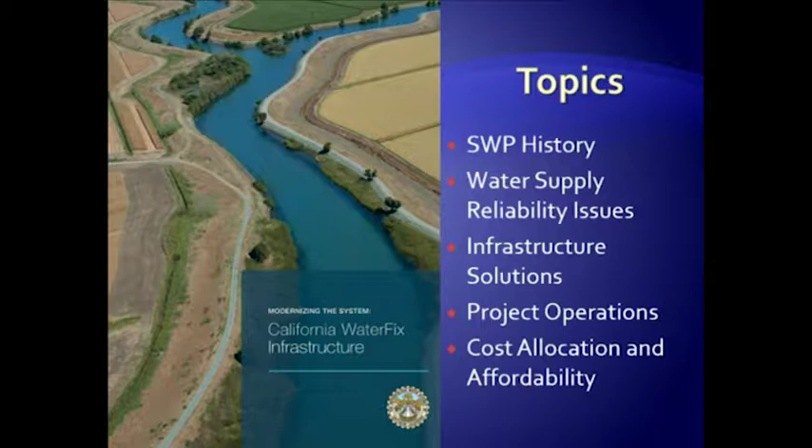I have 5 basic topics for today: a little history on the State Water Project, the water supply reliability issues we're trying to solve, the infrastructure solutions called California WaterFix, how that infrastructure will operate, and perhaps most importantly, how we'll allocate and afford the costs associated with those facilities.

The California WaterFix has a lengthy list of obligations. Number one, provide water supply reliability that has been lost. Number two, based on Governor Schwarzenegger's Blue Ribbon Panel formed 10 years ago, which came up with a Delta plan establishing co-equal goals in the Delta—increasing water supply reliability while also taking care of the ecosystem, which this project does, through flexible operations in a dynamic fishery environment.

Hopefully by the end of my talk you'll understand what I mean by that. At the same time, the project improves water quality in some instances significantly, especially for those in our service area that run surface water treatment plants on State Water Project water. We significantly reduce impacts associated with seismic events in and around the Delta, and also risks associated with sea level rise.

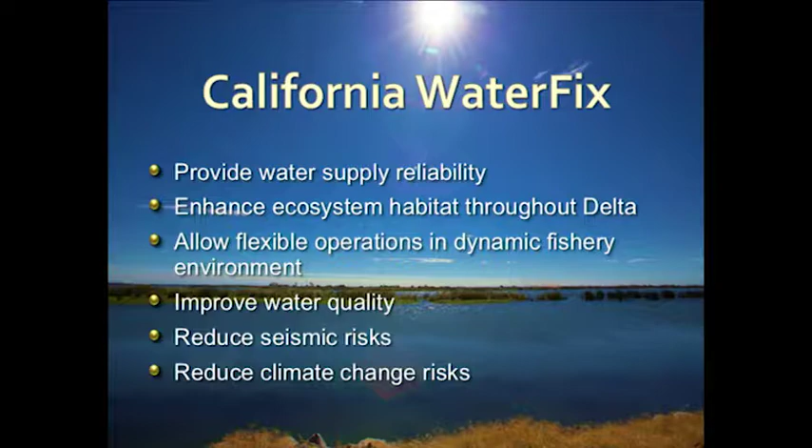This is a very brief history of the project. The first version of the California State Water Plan was in 1931. That resulted in the Central Valley Project Act, approved by the state legislature in 1933, which was the genesis of the State Water Project. It took about 38 years to make the first delivery in the State Water Project—that's the year we took delivery of our first acre-foot.

Although when the project was first built and started delivering, they recognized there was a piece missing—the piece California WaterFix is trying to fix. At the time, it was called the Peripheral Canal. I'm sure most of you who were here in 1982 remember that name. It was a hotly contested statewide proposition that failed.

There have been multiple efforts since 1982, including the Bay Delta Accord process in 1994, and then the joint federal-state project called CalFed in the year 2000. Here we are in 2017, finally with a project in front of us that can actually solve the problems created back when the State Water Project was first built.

The State Water Project is a 600-mile long system that starts on the Feather River just outside Oroville, flows down the Feather River, is captured behind that dam, joins the Sacramento River just north of the city of Sacramento, and is delivered through the Delta into the California Aqueduct. Our piece is about as far away from the origin of this water as you can get—we're that small purple bar in the middle of the bottom of the state. The system includes 19 dams and reservoirs, 20 pumping plants, 10 power plants—we're the fifth largest producer of power in the state of California—and 662 miles of aqueduct.

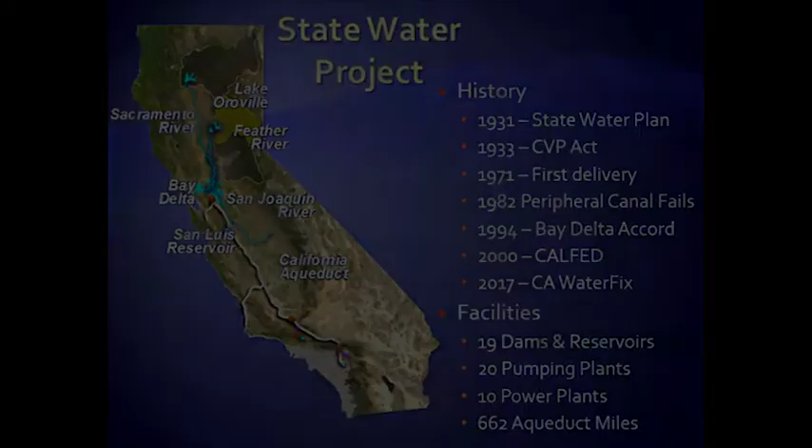California WaterFix is designed to solve four different risks, primarily in and around the Sacramento-San Joaquin Delta area: subsidence, fishery declines, seismic, and sea level rise. I'm going to go through each one of those.

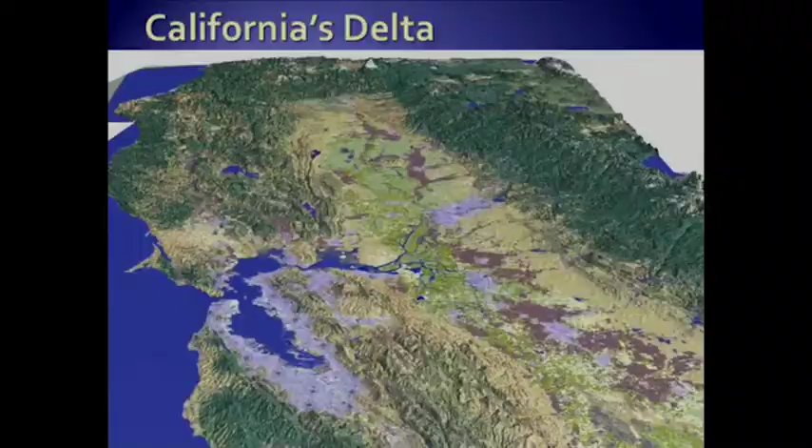First, we're going to zoom in on the environment we're dealing with. Off to the left is San Francisco Bay and the Pacific Ocean. To the north is the city of Sacramento. To the east is the city of Stockton.

How water gets into the Delta is a very interesting area. 80% of the flow that enters the Delta comes from the Sacramento River. This is really good quality — essentially snowmelt from the northern Sierras.

We also get 15% of the flow into the Delta from the south. The San Joaquin River flows north and the Sacramento River flows south, and they join in the Delta. That provides about 15% of the flow, and it's very poor quality because it's primarily agricultural runoff.

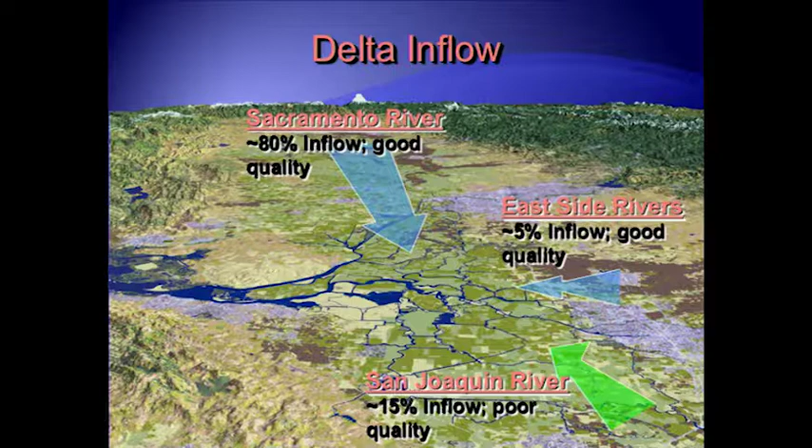There's another 5% of inflow that comes from the east side rivers, which again is captured in dams primarily and delivered to customers and/or to the Delta, and it's primarily snowmelt, so it's very good quality. The important thing to remember is this is a saltwater or tidal influenced Delta.

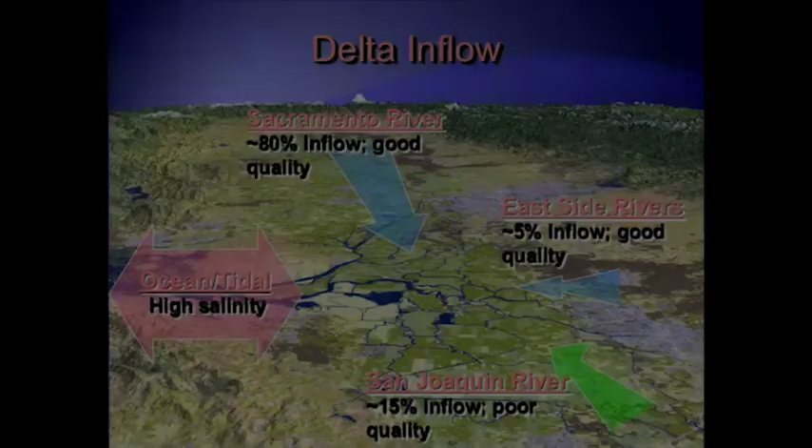So how is water used in the Delta? 76% of the water flowing on the surface that comes into the Delta flows out to the Pacific Ocean. 6% of the water is used by agricultural interests in the Delta, and 18% is delivered to the Bay Area and to Central and Southern California.

Now, if you were to listen to our detractors, they would have you believe that we are diverting 76%, but it's actually 18%.

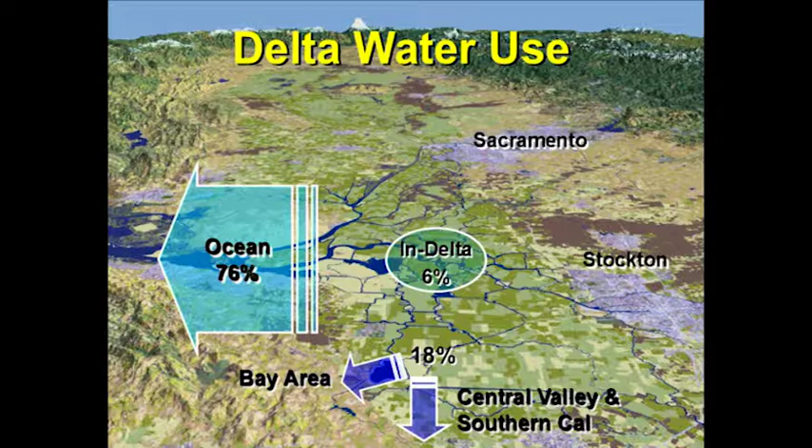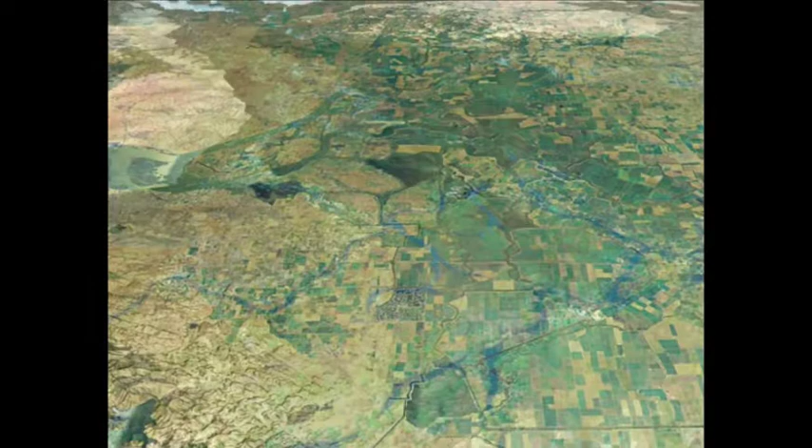This is a picture, a view of what the Delta looks like today. It's essentially agriculture, but we're going to step back in time roughly 170 years, and this is what it looked like before we decided to turn it into an agricultural preserve.

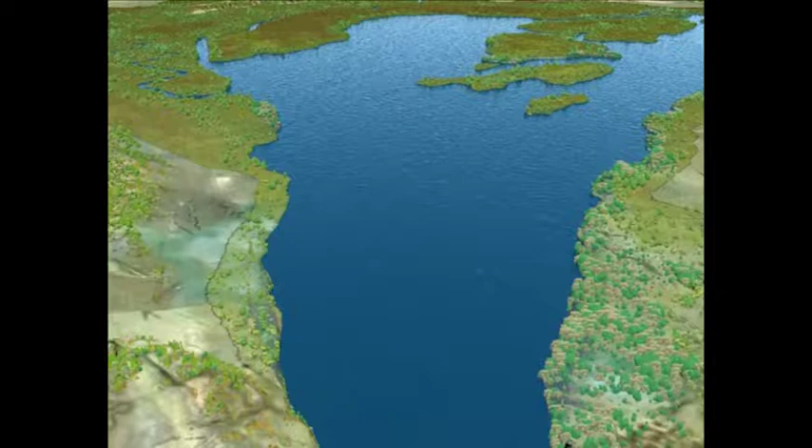This would have been a tidal influenced estuary, where during the spring and winter, fresh water would rush out of the rivers and the Sierras, pushing the salt water out into San Francisco Bay. In the summer and fall, you would have the exact opposite effect — there would not be enough water coming out of the river, which would mean the tidal influences would dominate, and this would be salt water. So salt water at certain times, fresh water at certain times.

All of the species that we're dealing with now evolved to survive in that environment, which does not exist anymore. And how did this happen?

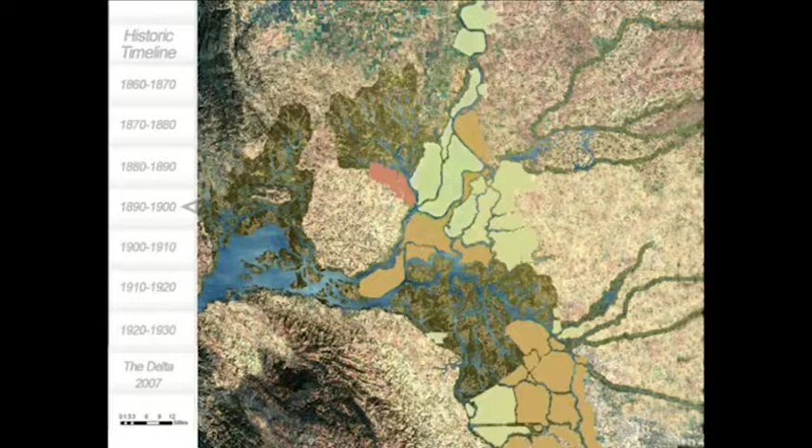Starting in 1860, the land in the Delta started to be reclaimed, essentially by taking soil, using it to build levees, pumping the water out of the inside of the levee to the outside, and creating farm ground. And that's what's happened to 95 to 98% of the land in the historic Delta.

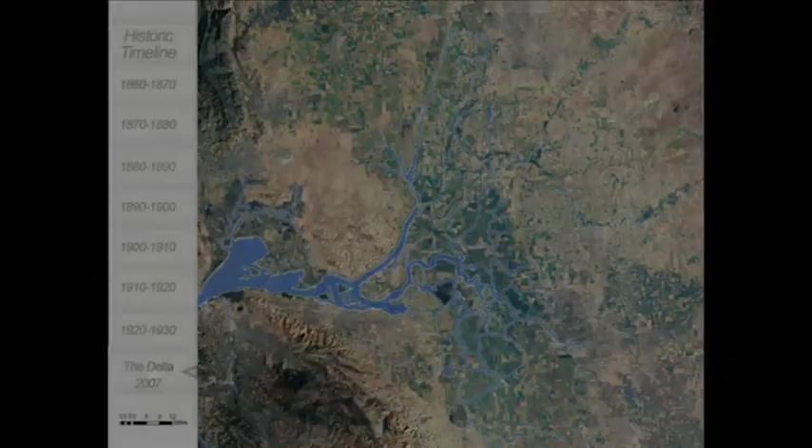And this is what it looks like today. Don't get me wrong, I like to eat food just as much as everybody else — I'm not against agriculture. The real key is who's responsible for the economic or ecological impacts associated with taking a saltwater, freshwater estuary and turning it into this.

Some would have you believe it's water agencies' responsibility to do that, simply because we're the most convenient knob to turn. We suggest that our customers should not be responsible for that. The species that used to live inside this estuary and have a hard time living in this should not be the responsibility of water agencies.

You can see the levees here. There's 1,100 miles of levees that look similar to this, all of them unengineered, meaning no engineering drawings. These are basically made by taking a dredging machine along a route that was probably a natural stream 150 to 170 years ago, taking dredge material out of the bottom of the stream and laying it on the banks on both sides, creating 1,100 miles of these unengineered levees.

So why is this important to us? Why do we even care? It's because this is how water supply for 25 million Californians, including the roughly 700,000 that we serve, get a portion or all of their water.

We capture water behind Oroville Dam, release it to the Feather River, where it gets commingled with other flows in the Sacramento River, and then we turn our pumps on in the South Delta. SWP stands for State Water Project — that's the state system. CVP stands for the Central Valley Project — that's the federal project. They're joint facilities; we pull our water through the Delta to our pumps and deliver it to our customers.

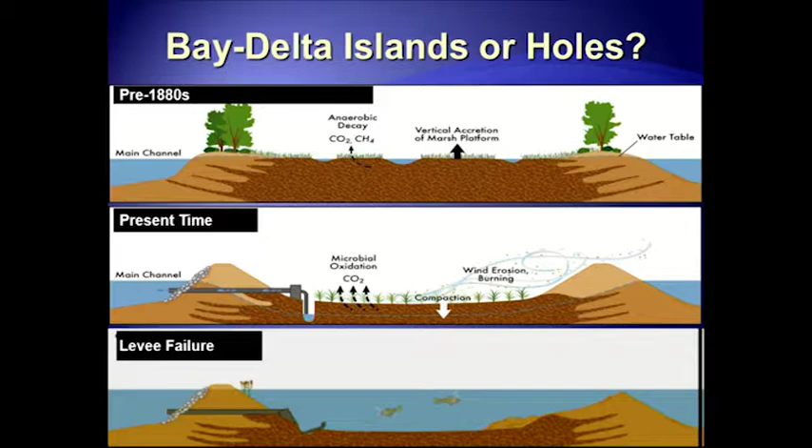And if you have a levee break, that hole fills up with water, so much so that we now have large portions of the Delta that are 30 feet below sea level. So these are surrounded by levees that hold water back, but on the other side of the levee, on the inside of the levee, that what we call the island, which is really a hole, we have a 30 feet deep subsidence. And again, this wouldn't be a problem for us except we deliver our water right through the middle of this zone.

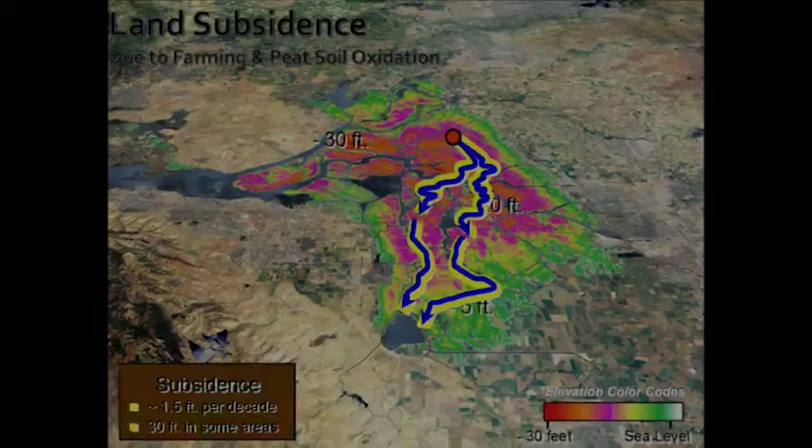So what happens when an unengineered levee sitting on top of feet and feet of peat and liquefiable sandy and silty soils, what happens when an earthquake occurs? Well, of course, it just disintegrates. And that's not a big problem if it happens one at a time. What's the problem is during a seismic event, these levees can fail on multiple islands.

And then what happens is what we call the big gulp. So if 3, 4, 5, or 10 of these islands, the levees failed, and now the water is rushing in, where is it going to come from? Pacific Ocean, right? It's the only place that it can. And we all know what water is in the Pacific Ocean. It's salt water. And now our delivery path is completely contaminated with salt water. Up to 1 million acre-feet of water flows into the Delta in the first 3 to 4 days.

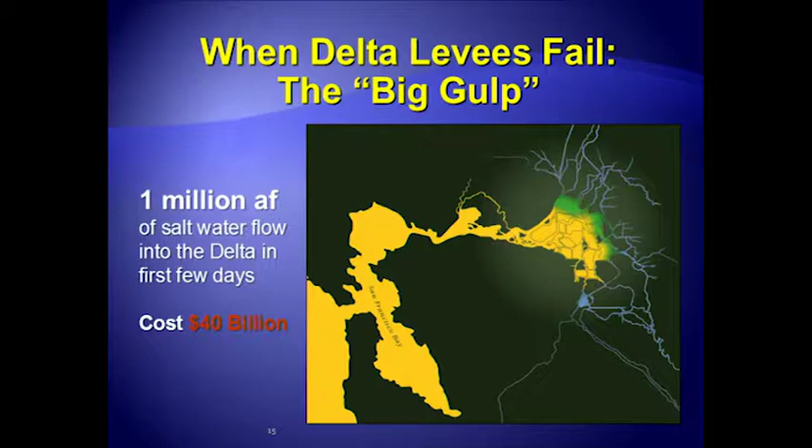The cost to eradicate this, because once the salt water gets in there, it's very difficult to get it out, is $40 billion. The U.S. Geological Survey, this is a federal government agency, came out with a report that there's a 66% probability that an earthquake of the magnitude that would fail multiple levees in the Delta will occur in the next 30 years. 66% probability.

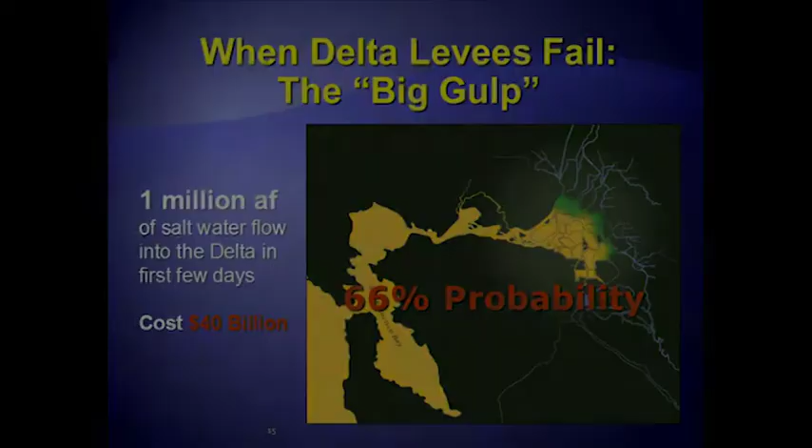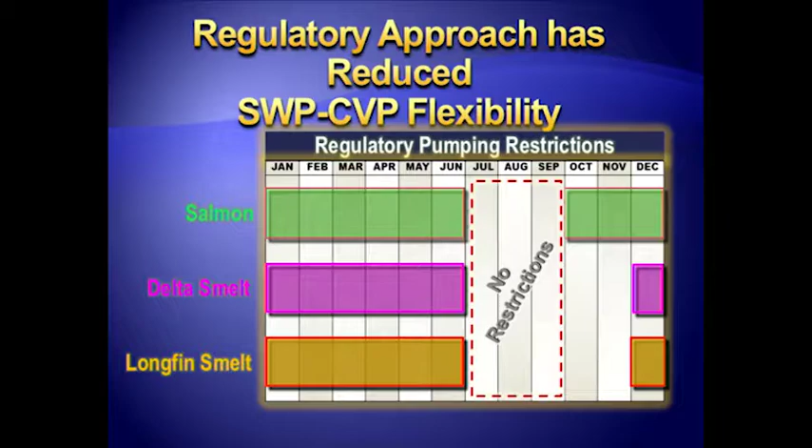In addition to seismic events, we also have, as I mentioned before, a lot of endangered species issues. I'm not going to go into a lot of detail on this, just take my word for it. There's many different fish that are on the verge of extinction. We certainly agree with that. So much so that of the three main species that we're dealing with and the restrictions associated with those three species, we're left with only 3 months a year where there's no restrictions on our pumping. Our concern is how long it will take for someone to find a fourth species that blocks the last 3 months that we have of no regulatory pumping restrictions.

This has resulted in approximately a 40% decline in the reliability of both the state and federal projects. We started at about 8 million acre-feet of annual delivery capability, and we're now down to less than 5 million acre-feet, and we don't know where the bottom is, and that's the big concern for us.

So now I'm moving from the risks into the actual facilities that we plan to build to mitigate those risks. Back in 1982, we had what was called the Peripheral Canal. It was an above-ground facility, almost 22,000 cubic feet per second diversion. We used the old school version of mitigation where you essentially go to a regulatory agency, ask them how much it's going to cost me to get a permit. They tell you how much it's going to cost you in water, not money. We pay these permit fees in water, and it's death by 1,000 cuts. A little bit more water, a little bit more water, a little bit more water, and there's no way to ever get it back. We don't do that in the modern world.

We do what's called adaptive management. That's where, when we believe we have science on our side, we believe that we don't pay all the costs up front in water. We get permits, we work with the regulatory agencies, and we manage through adaptation to meet the requirements of the environment, while also meeting the needs of our customers. Sounds risky, and it is, but we know the old way doesn't work. With the old way, where it ends, we don't know. It's just more and more water.

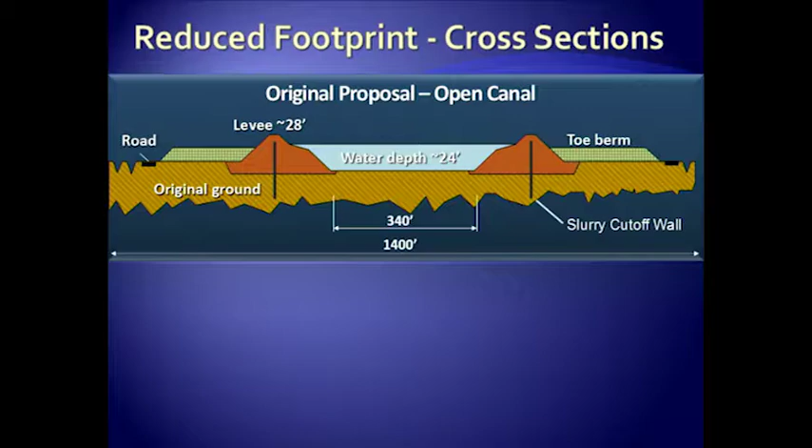The new system is a 9,000 cubic feet per second diversion. The old open canal system was roughly 1,400 feet of disturbance for roughly 40 miles. If you're a farming interest or some other community in the Delta, you can understand why they don't like having this roughly quarter-mile wide scar on top of the earth throughout their communities. But this is what we have now.

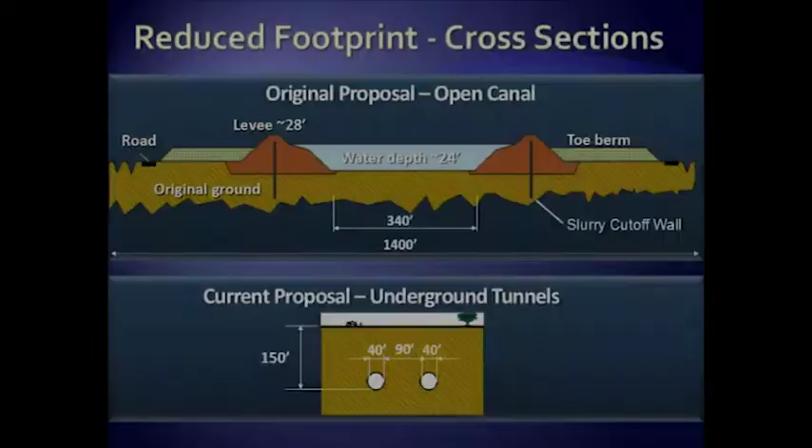Essentially, when we're done, they won't even know we're there, other than a few access pits. No one on the surface will even know the California WaterFix tunnels are operating. We have 3 intakes in the north, so we moved our main intakes out of the Delta. I'll show a picture of one of those in a minute. They deliver water to an intermediate forebay and then into the dual tunnel system, roughly 30 to 35 miles, right down into where our pumps are right now.

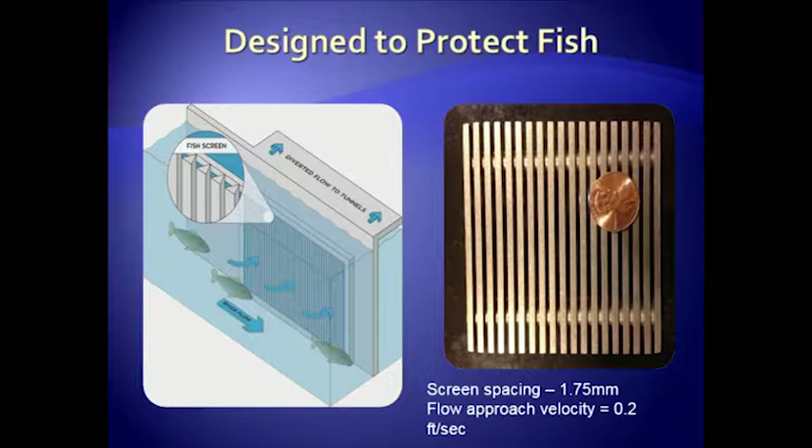This is what one of the modern fish screens looks like. Right now, when we turn on our pumps and pull water to the South Delta, any fish caught in those flows hit a dead end. There's nowhere for them to go. These fish screens are built so that fish are not impinged and don't dead end anywhere. They work because they're so long, 1,200 to 1,800 feet, that the entrance velocity into these facilities is so slow, 0.2 feet per second, that even a small fish isn't impinged on the plate when you're diverting water. You can see how narrow the grate is compared to a penny.

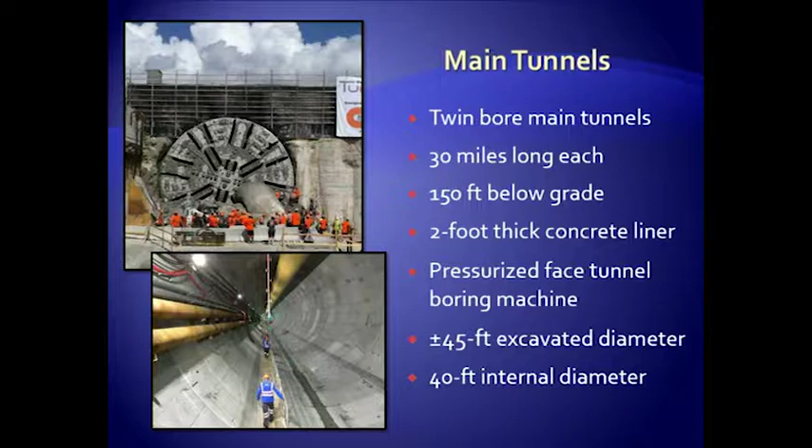This is a big tunnel project. Twin tunnels, 30 miles long each, 150 feet below the surface. We'd be using a pressurized tunnel boring machine. Of course, this is underwater boring. 45-foot excavated diameter with a 40-foot finished internal diameter.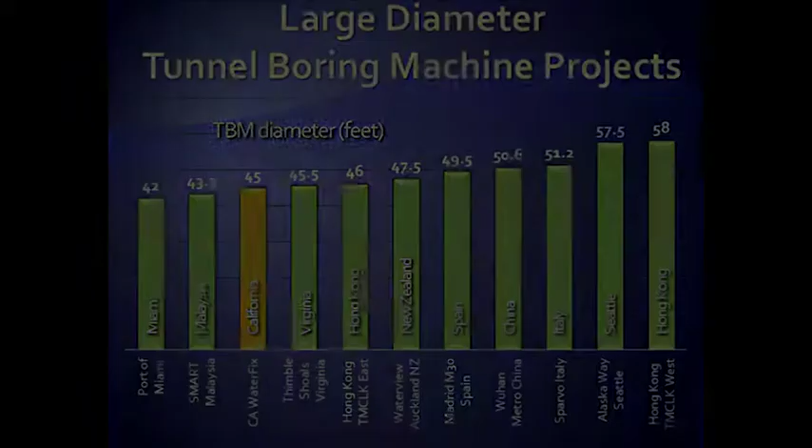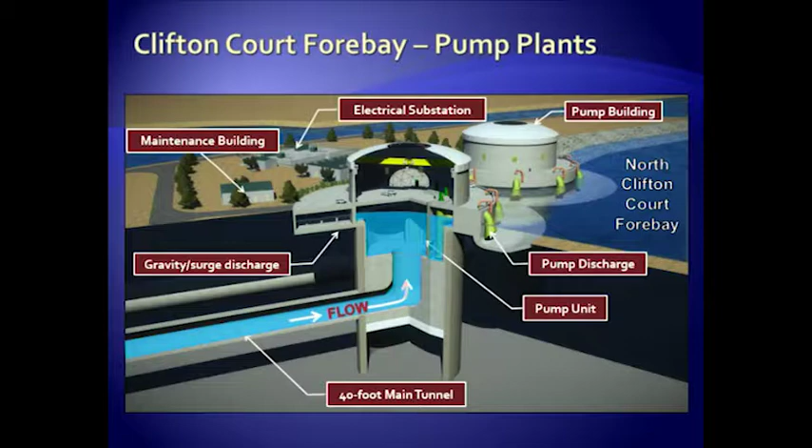So the way this works: we divert water out of the Sacramento River to the north. It gravity flows all the way to the south, fills up inside this building, and as long as we're diverting up to 4,500 cubic feet per second, roughly half the capacity of the total system, it can all flow by gravity, just 10 feet of head. As big as these facilities are, you can flow 4,500 cubic feet per second and not turn on a pump. A huge cost savings.

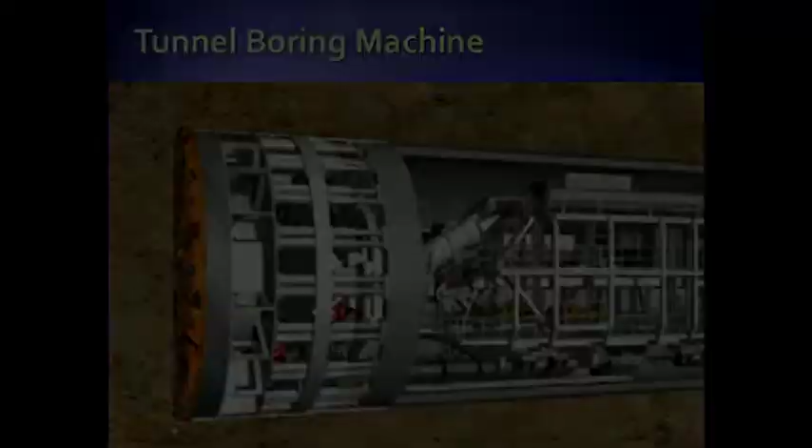This is a picture of the tunnel boring machine. It basically drills a hole, then concrete rings show up in sections, get delivered along the bottom, and you build the tunnel walls as you're drilling. The muck goes out through muck trucks out the back end. There'll be somewhere between 6 and 8 of these machines all working at the same time from different locations. You access and install the machine in the tunnel by building these tunnel shafts.

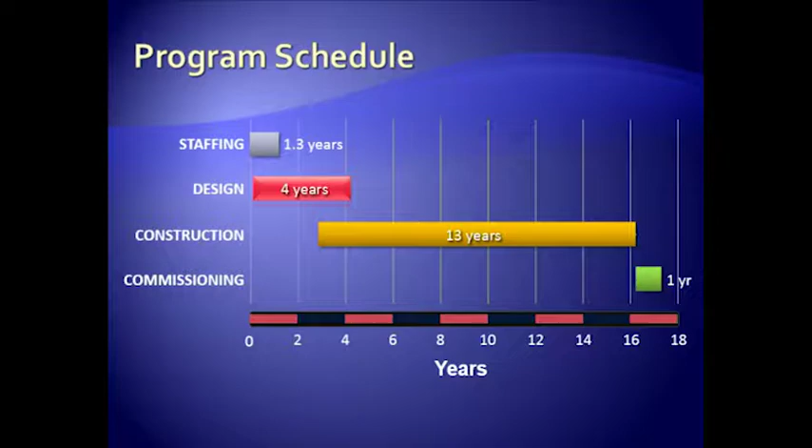How long is this going to take? A long time. Under conventional delivery methods, design, bid, build, it's probably 18 years to commissioning. Using a design-build or other accelerated program, we can probably cut 4 years off of this.

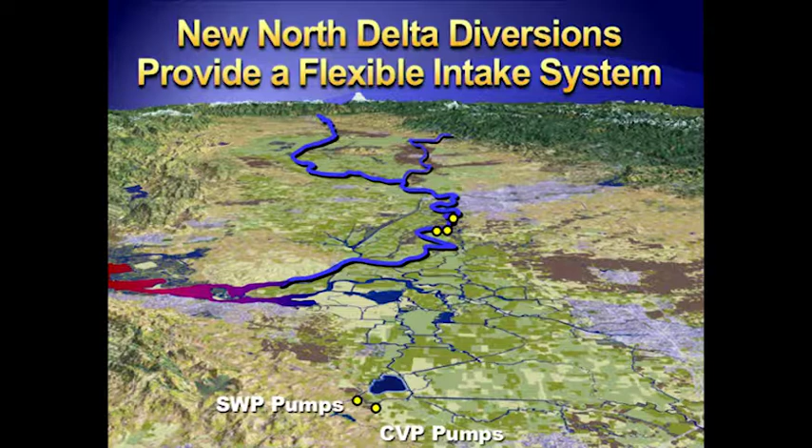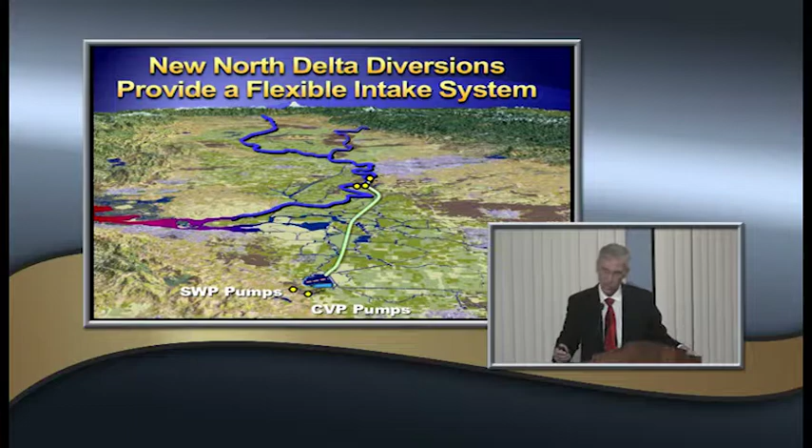So how do these facilities operate? I think I've been through most of this, but we have these 3 diversions along the Sacramento River. They deliver water to our pumps. Also, I forgot to mention, the south diversion we use today is still going to be accessible to us if all the conditions are right, no fish in the area, water quality is good. We can still deliver water from our south pumping plant. So it's really a dual delivery system. It provides us a lot more flexibility. These are just the benefits of the new system.

So what does this buy us? Here's where we are today, 4.7 million acre feet of delivery capacity between the state and federal projects. Without it, based on current modeling, we would be headed to somewhere between 3.5 and 3.9 million acre feet. And we believe this system gets us up to another 600,000 acre feet in addition to what we have today. But again, this is really a hedge against future regulatory actions that would cause decreases to our existing, already compromised supply.

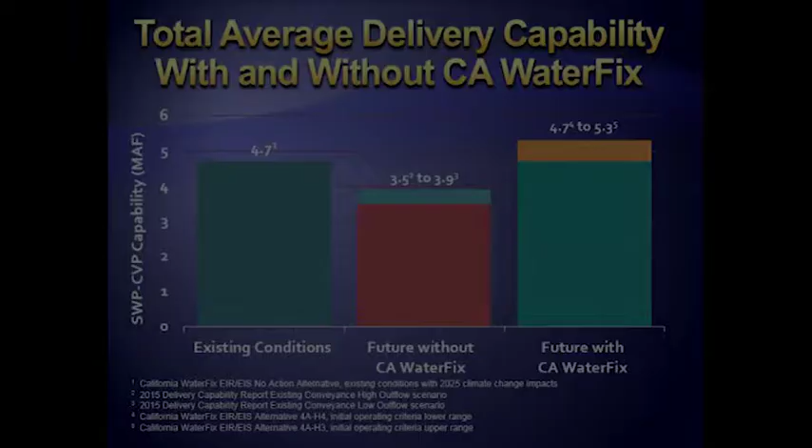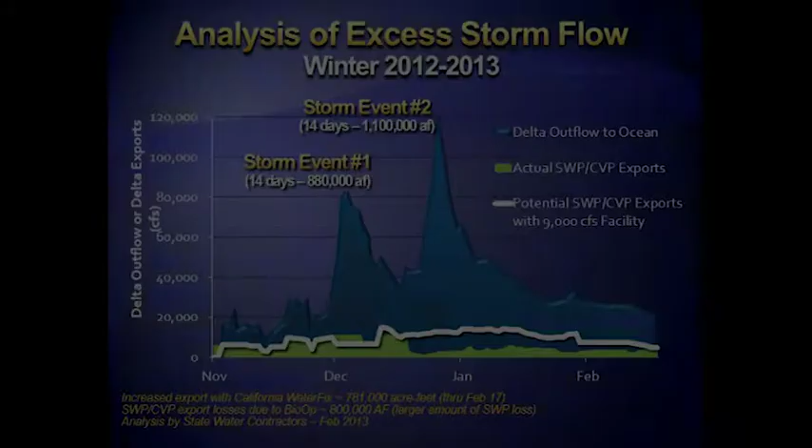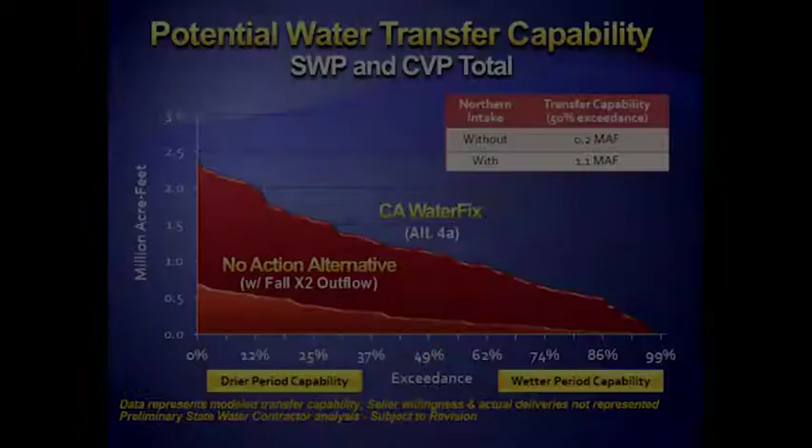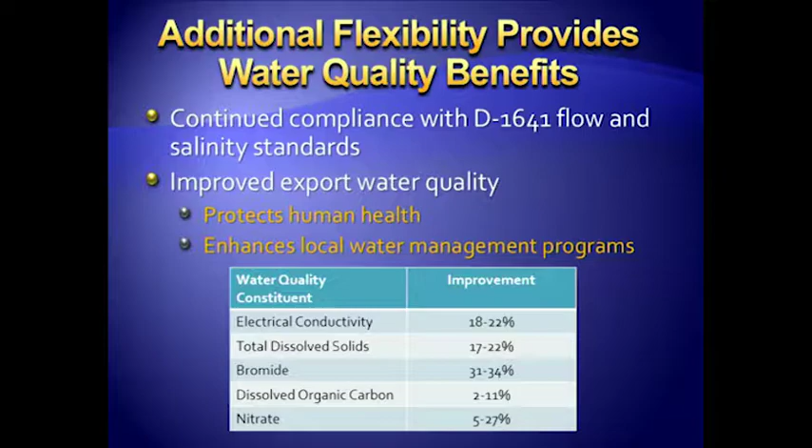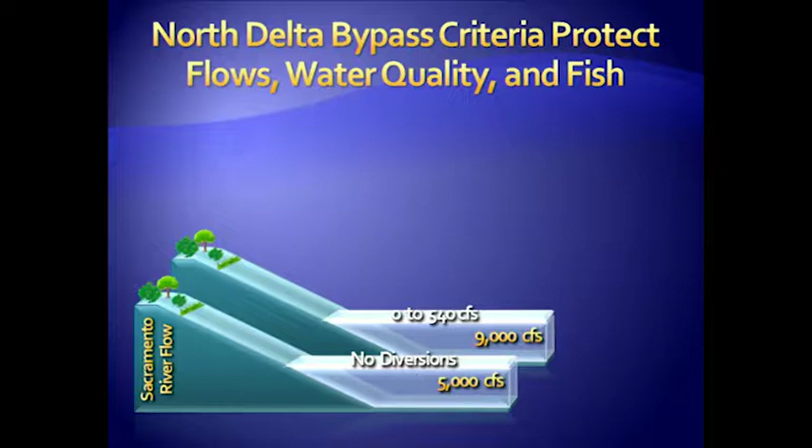So our detractors have been trying to convince the state of California residents that somehow if we build this system, we're going to dry up the Sacramento River. That can't happen. Up to 5,000 cubic feet per second flowing in the Sacramento River, we can make no diversions. If there's 9,000 cubic feet per second in the river, we can only divert 540 of that, and on and on. Our full capacity only occurs when the river is flowing at 35,000 cubic feet per second or more.

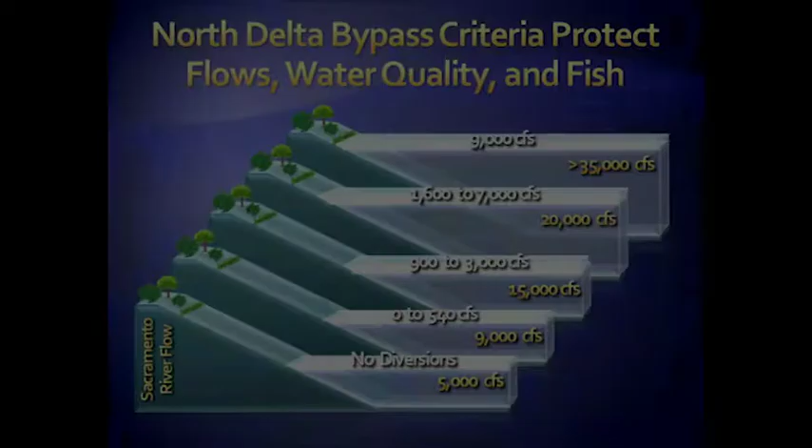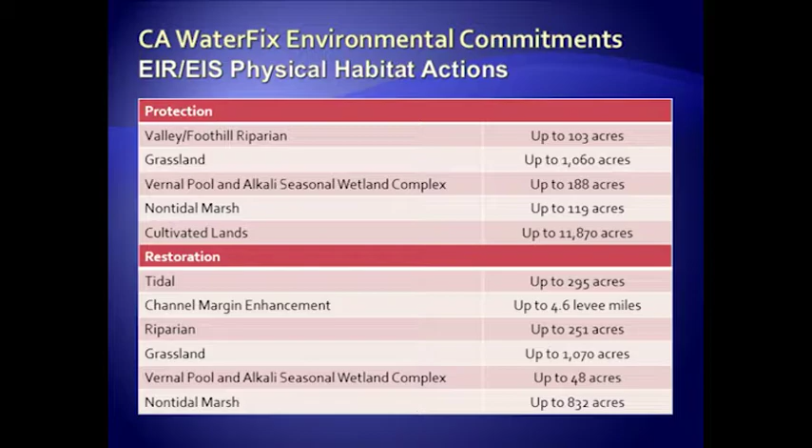In addition to all of those benefits that I just went through, we also have hundreds, thousands of acres of physical habitat that we'll be building. These are the responsibilities we have as a water project. However, all of the other impacts to the Delta that started 150 plus years ago are going to be covered under a separate project called California Eco Restore. Again, this is not the obligation of water agencies to pay for the damage caused by converting a tidal estuary into agricultural land. That's for somebody else to pay for.

What are the cost implications? I'm almost done here. So for us, we think, we being the 5th largest contractor, that we're pretty important, but in the grand scheme of things, we're a really small piece of this project. We're 1.3% of the total project. That's how big this project is. Or of the state water project side of it, we're 2.5% of that.

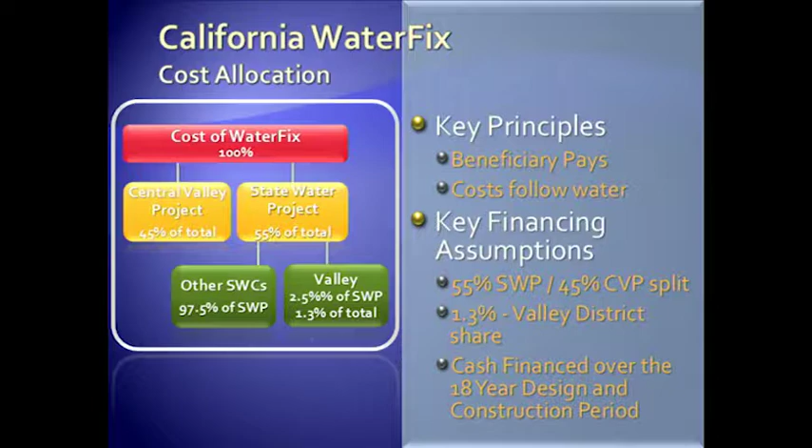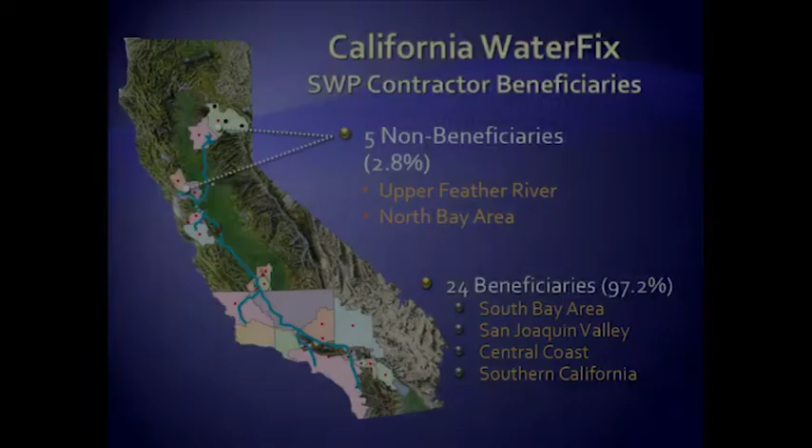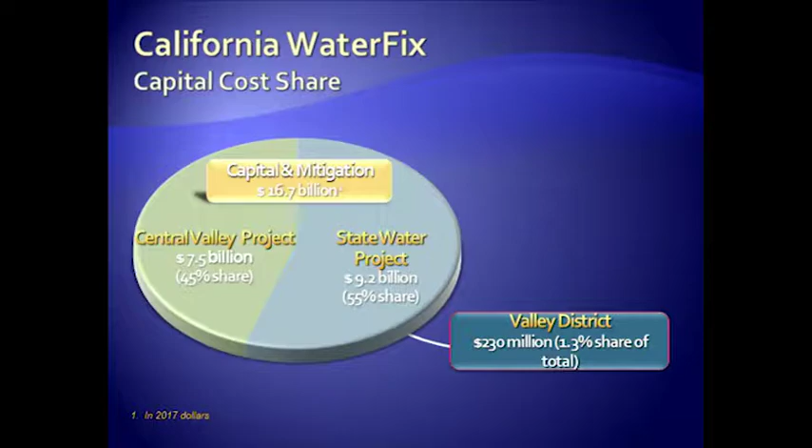There's an estimated cost share between the state water project and Central Valley project of 55-45. Our assumptions include, and our board has adopted a resolution stating their intent to cash finance this project over the 18-year design and construction period, and I'll show you what that means to our customers in just a minute. So we have 29 state water contractors, 24 of which will be participating in this project because the other 5 are non-beneficiaries, meaning they divert their water north of the Delta, so they don't need these facilities. However, the 24 beneficiaries south of the Delta represent 97.2% of the total supply. When we do our 45-55 split, that's $9.2 billion out of the $16.7 billion capital and mitigation project cost. Valley District share is $230 million, if we could write a check at the beginning.

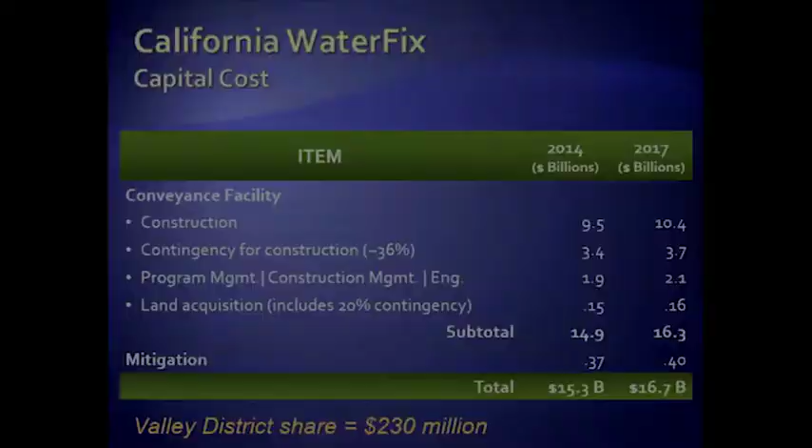Lots of cost estimates have gone on, but right now the best estimate includes a $4 billion contingency, so it's very conservative. We also have operations and maintenance costs to include when analyzing the impacts of a project like this. Those costs would be $900,000 per year for Valley District's customers, in addition to what we already pay.

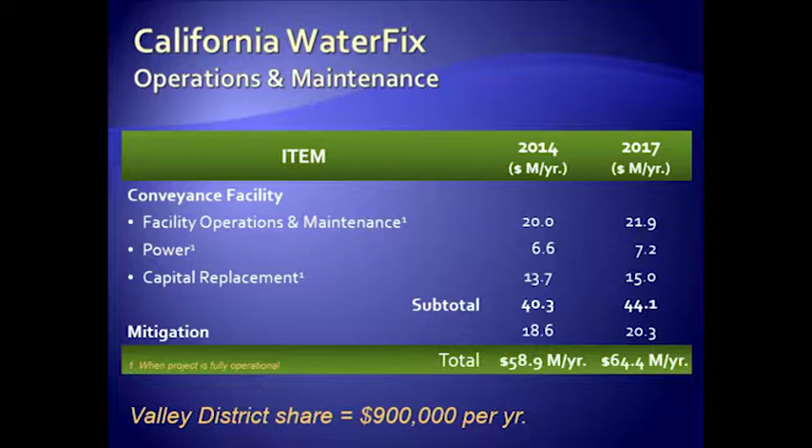So we're trying to normalize all of this information to help people within our service area understand what the impacts are to them, because it's hard for people to wrap their brain around a $230 million project. What does that mean to me?

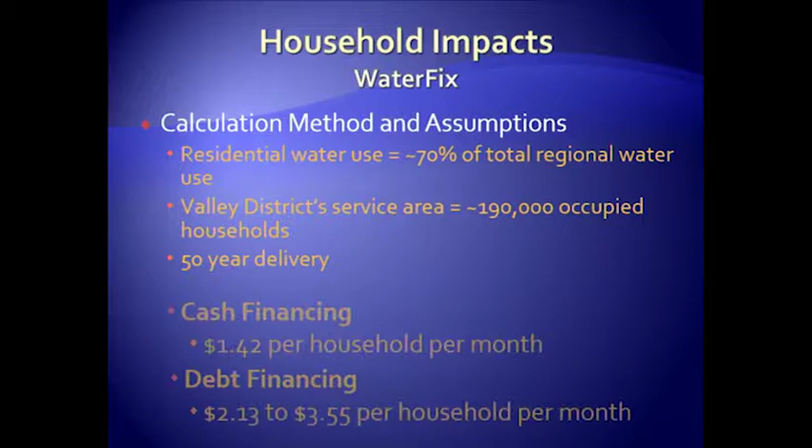We're using a calculation method that's been used by others. We know that about 70% of the water use within our service area is residential, the other 30% is commercial and industrial. We also know we have approximately 190,000 occupied households, and if we assume the facilities will deliver water for 50 years, though they'll likely deliver longer, the cash financing cost per household per month is $1.42.

Now if we were to debt finance that, as you can imagine, we're paying interest charges on 30 to 50-year bonds, so the cost goes up significantly to $2 to $3.50 per household per month for 50 years. Again, our board adopted a resolution stating their intent to cash finance this project. They're in a position to do that primarily because of the dissolution of redevelopment agencies within our service area, which has resulted in approximately $20 million a year of property taxes, derived from our tax rate, that are now coming to us instead of going to redevelopment agencies as in the past.

If we look at it on a cost per acre foot basis, we like to analyze every project we bring to the board to make sure it's in line with other options we have. Looking at the modeling, somewhere around 16,900 acre feet per year would be available to our customers versus the no-project alternative. The capital cost is $230 million, plus O&M for 50 years of $900,000 a year adds another $45 million, and we end up with $325 per acre foot, water delivered to our pumping plant at Tracy, California. Pretty reasonable compared to other options available to us.

Be happy to answer questions.

Would you tell me, is my water rate going up by $1, whatever you said? Oh, good. Yeah, good point.

So no, this is paid for with property taxes, and it's already been either acquired and will be paid for out of our reserves, or will come from existing property tax rates. As a matter of fact, the district board reduced the tax rate by 1 cent per $100 of assessed valuation this year, and most likely we'll have an opportunity to do the same thing next year. So know that this is not new taxes, this is existing. Anybody have any questions?

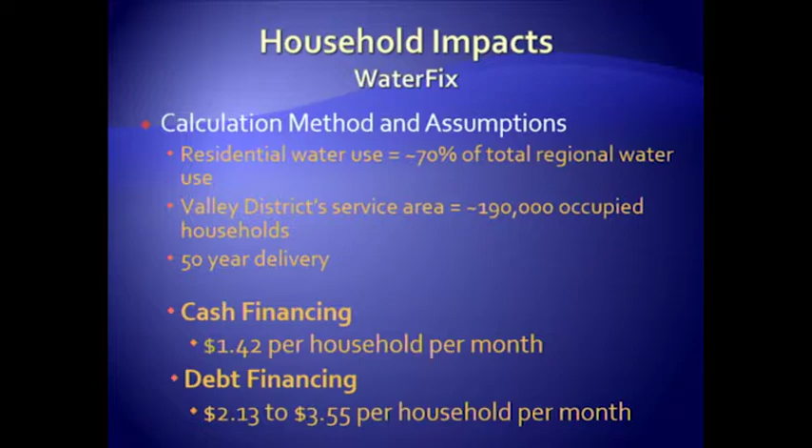Anybody from out there have any questions? None? Really? Gee, see how good you are? Or I bored them to death.

So just a point that maybe you can answer to give everybody perspective. Like you said, the state water contractors are made up of how many contractors again? 29. And of that, 26 are participating? 24. So it's going to require a concerted effort by all of those boards to buy in, similar to what Valley District did.

What is the status on all the other agencies at this time? Yeah, so of the 24 agencies, 12 have taken votes to support this, these are state project agencies. None have taken positions of opposition. The others are just not asking their boards.

The only agencies out of the 24 that we know of are going to have a hard time paying for this are the agricultural agencies. We have 3 agricultural agencies, state water contractors, that are going to have a hard time justifying even these low costs, simply because they're used to paying significantly less. If our brothers and sisters in the agricultural community can't participate, we'll resize the project and we'll just move forward. We hope that doesn't happen.